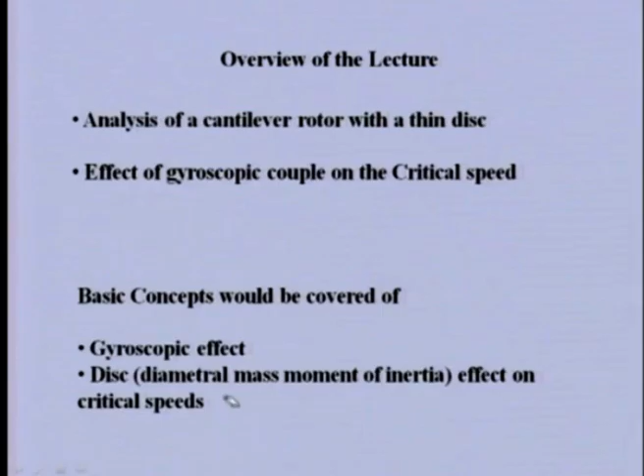Now with a simple example, let us see when this gyroscopic couple will be predominant. Let us take a simply supported case in which this is the bearing axis, and we have rigid bearings, that is, simply supported condition, and this is the shaft elastic line. Let us say the disc is at the center, at the midspan of the shaft.

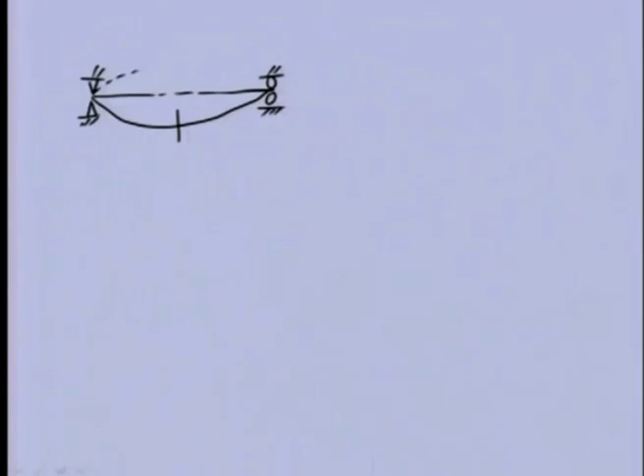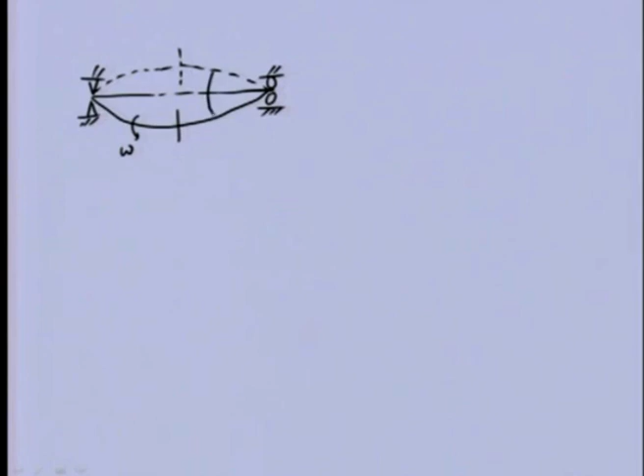During whirling, we will observe that the disc would not tilt. It is spinning about its own axis with omega, but disc tilting will not take place because it is at the midspan, and at midspan the shaft slope is zero. So during whirling, there will not be any tilting of the disc. Once the disc is not tilting about its diameter, there will not be any gyroscopic couple effect on this system.

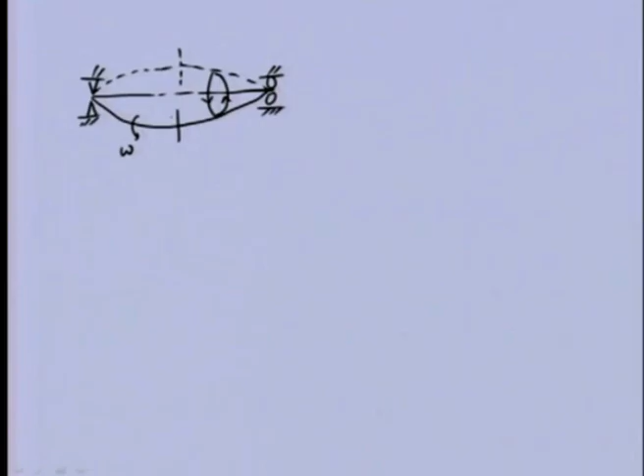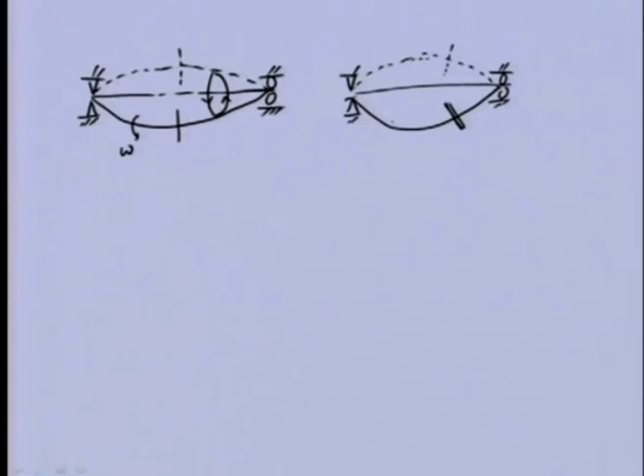But if the same system has the disc at an offset position, let us say here, then because the disc at any particular position should always be perpendicular to the shaft elastic line, we will find that the disc will tilt about one of its diameters in this plane. So not only are we having spinning of the shaft, but the disc itself is having some kind of precession frequency, and that is the whirling frequency of the disc.

So this wobbling motion of the disc, along with the spinning of the shaft, would give the gyroscopic couple. So we expect this gyroscopic couple effect will be present in this particular model.

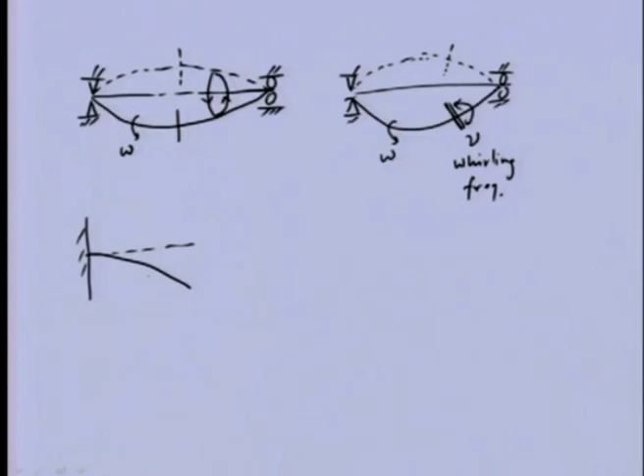Another case, if we consider a cantilever shaft, and this shaft is massless, only elasticity is there, and let us say the disc is in the form of a point mass m. If this is spinning at certain frequency during whirling, we expect this will occupy this position. So this is one of the cases.

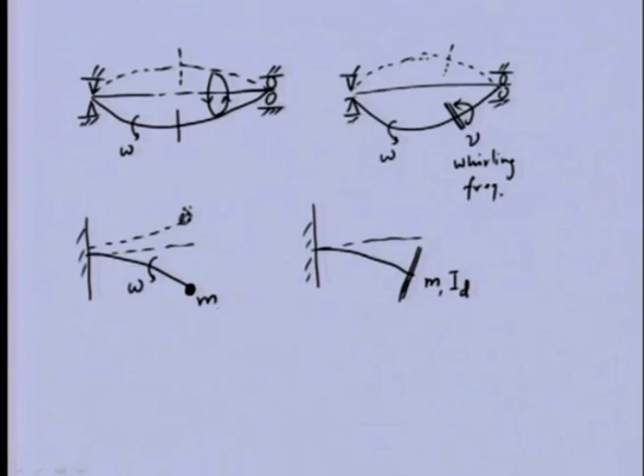If this particular cantilever beam is having a large thin disc of the same mass, but having diametral mass moment of inertia of the disc—in the previous case, because it was a point mass, the diametral mass moment of inertia will be nearly 0. When this is spinning, we will find that during whirling, this disc would be tilting about its diameter.

So in this particular case, we expect a gyroscopic couple. So you can see there will be precession frequency of the disc.

So if we consider this particular model of the rotor, in which the mass at the free end are same, but only difference is here is point mass, here it is disc—we expect the critical speed of this system and this system should not be same. Especially when this particular speed is high, we will find that the gyroscopic couple will make the critical speed of this system and this system different.

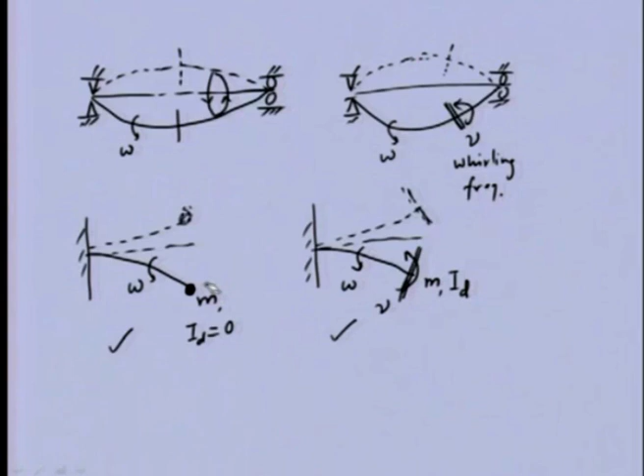So with this example it is very clear when the gyroscopic couple will be present in the system and when it will not be present. So when a point mass is there in a cantilever beam, we cannot expect a gyroscopic couple in that, because its diametral mass moment of inertia is 0.

So now we'll consider a simple cantilever beam. We will not be considering any unbalance in that particular disc. We are assuming that there is no unbalance in the disc, and we are operating near the critical speed of the system, so that the natural frequency or the whirl frequency is equal to the spin speed.

As I mentioned, when gyroscopic couple is there, the whirl frequency and the spin speed may not be same, but in this particular case we are considering a very special case in which we are trying to find out at what speed the whirl frequency is equal to the spin speed. That means we are trying to find out directly the critical speed of the system.

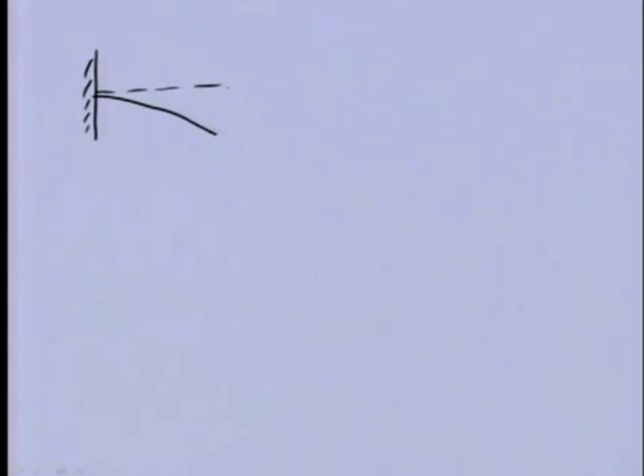In this particular case let us try to analyze a cantilever beam with a large disc at the free end. If this is the disc, this shaft is spinning and the disc is also spinning with the same speed. Because of this, for this particular configuration, let us say when the shaft is at the bottommost position during whirling, let us see for this particular instant how the centrifugal force of various mass elements of the disc is acting.

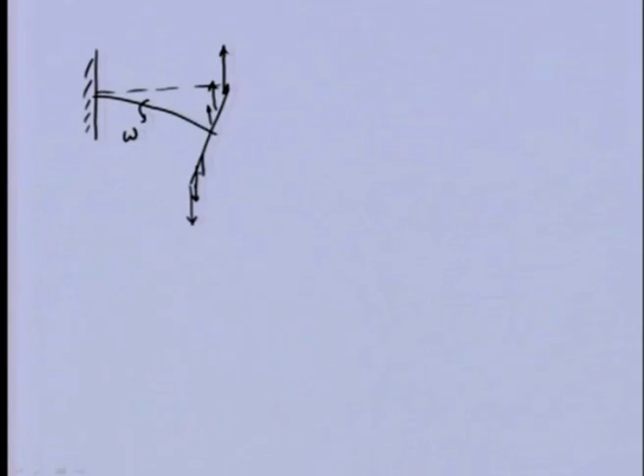For this particular instant, we will see that the mass element which is away from the spin axis will be having large centrifugal force, because it is spinning about this. As we come toward the spin axis, these centrifugal forces will be lesser and lesser, like this.

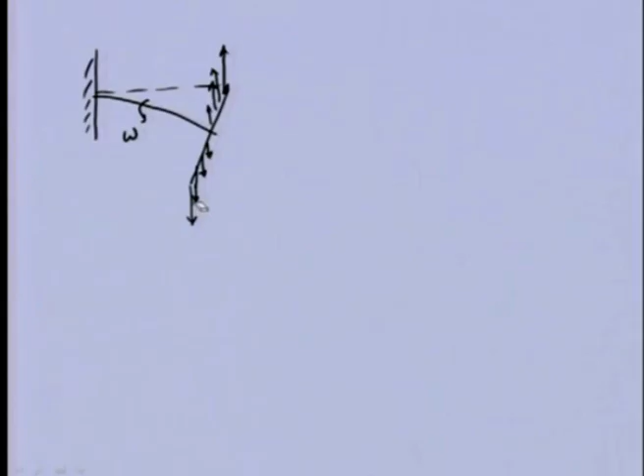Now, if we see the effect of this centrifugal force, what it is trying to do to the disc—it is trying to apply a couple which is acting in the counterclockwise direction. So it is trying to orient the disc to its original vertical position, because the tilt of the disc during whirling is this angle, and this particular moment is trying to oppose that tilting which is coming from the centrifugal force.

So we will see that because of this moment, the effective stiffness of the shaft against rotation is becoming higher, because this particular moment is trying to prevent—it is making this particular angular displacement lesser and lesser because of this moment. You can expect that when the centrifugal force is high, as we are increasing the speed, this will be more and more, and we expect this moment will be more, and because of that the effective stiffness of the system increases.

As we know from fundamentals, the natural frequency is defined as root square of k by m. So if stiffness is increasing and mass is the same, we expect that the natural frequency of the system should be increasing.

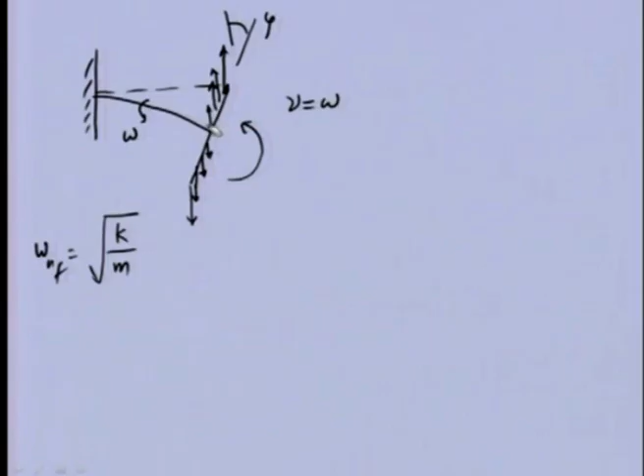This particular phenomena, which I have illustrated through the centrifugal force concept, we will see in more detail through the concept of quasi-static analysis, in which we will find out the effective force and moment this centrifugal force is applying at the free end of the shaft, and from there we will get the frequency equation to calculate the critical speed of the system.

Now we will analyze how the whirl frequency of the system increases with the spin speed of the shaft because of the centrifugal force. Let us take the same example, and now we will see this particular disc from the side, to see how this system behaves.

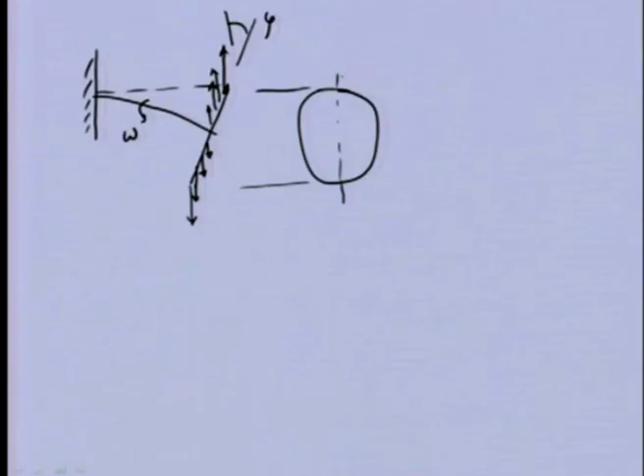Let us say this is bearing axis B2, and this bearing axis we are representing as Z, and this direction is Y. So this angle will represent as phi x. This is the static deflection, let us say delta, of the center of the shaft or the disc.

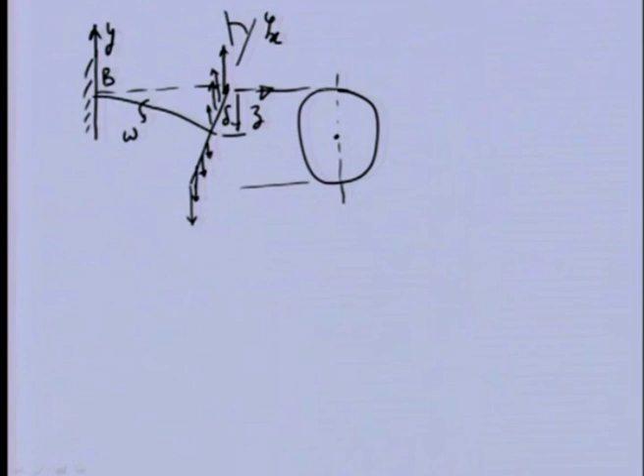Let us say the intersection of this axis to the disc is B. This is the shaft center which is coming from here, and this B to C distance is the translatory displacement of the shaft from its equilibrium position of the bearing axis.

Now, if we consider a small mass at radius r1 from the bearing axis, and look at the motion of this disc, as I told, we are looking into the condition of synchronous whirl. Let us see what this particular motion represents.

In the synchronous whirl condition, the spin speed, that is the spinning of the disc, and the whirling frequency - considering this as a cantilever beam - the whirling frequency and the spin should be the same.

When we consider this synchronous whirl condition, the shaft will bend, and once it is bent, it will be rotating about the bearing axis in rigid body mode, without further bending of the shaft.

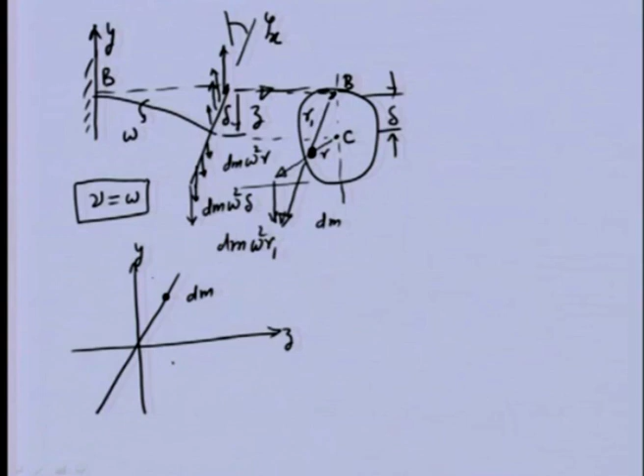This is the disc, and let us say there is a particle here having mass dm, at point P, and this is the shaft attached to the disc. Now this is the center of the disc, C. The tilt is about the x axis, so phi x.

This is the case for pure whirling, with no spinning. If we view from the side, let us say this is the y axis and this is the z axis, particle P is here at radius r, and this is the center of the disc.

Now consider this particular force acting in the downward direction. For this configuration, not only this mass but each and every mass will have the same inertia force, because each particle of the disk has the same delta displacement. So this mass dm at P will have a force dm omega square delta, acting in this direction on this plane.

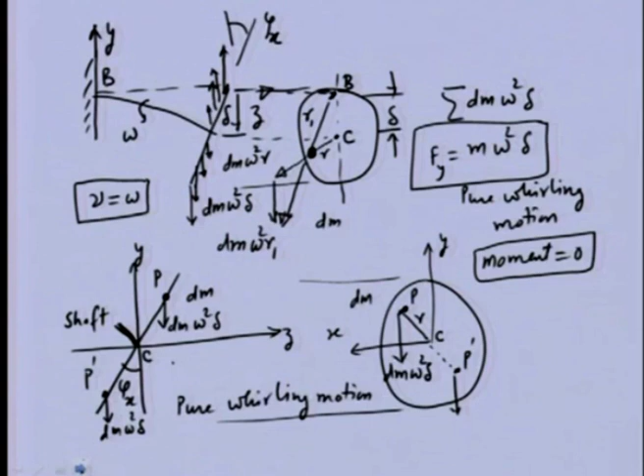Now let us consider the pure spinning motion of the disk. I am again drawing the free body diagram of the disk in, let us say, the z-y plane. Z is the bearing axis, the disk is here, and the shaft is this one.

Now, if we take the diagram in other plane, we will see the disk like this. This is the center of the disk C. These are the y axis and x axis. P particle is, let us say, here, and radius of that is r. Let us say this inclination with respect to x is theta.

Here, because of the pure spinning, we have centrifugal force omega square r dm, acting radially outward. This particular force we can take components in two directions. From here we can relate, let us say, this distance is y and this distance position from the position of the mass is x.

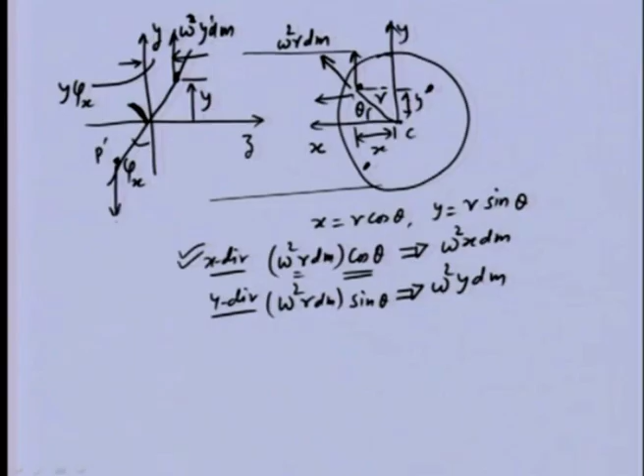If we consider another point, let us say below, this particular force in the y direction, if we consider here p prime, which is below, this will act in this direction because it is spinning. The magnitude of this will be the same as the upper one. So you can see that they will make a couple. They will balance each other, but they will make a couple.

The magnitude of the couple we can find out will be, so let us say for single mass dm, the couple about the bearings, the shaft center, in the yz plane, omega square y dm is the force, and moment arm is y phi x. This is the moment arm. So this is a couple due to a mass dm.

If we sum such moments, we can get the total moment due to the various forces, and because omega is constant, it will come out of the integration. This is also independent of this integration. So we will be having y square dm, and we know y square dm is nothing but diametral mass moment of inertia of the shaft, of the disc about its diameter.

Because in this particular case, when we are considering pure spinning, I will speak on here. For the case of pure spinning, we found that the x component forces are cancelling each other, whereas the forces in the y direction, they are giving a pure moment, and that moment is the gyroscopic couple moment.

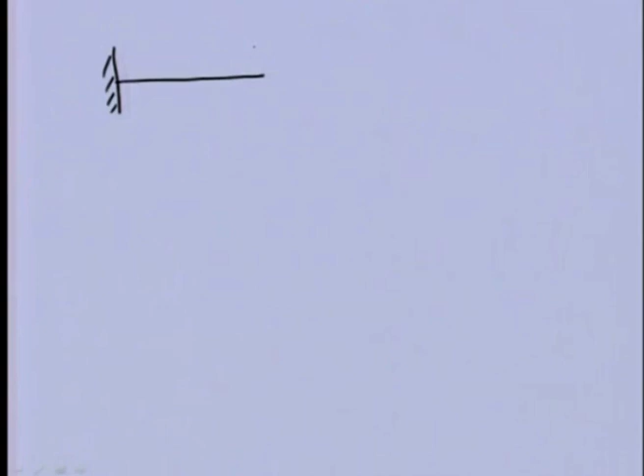From the previous analysis of pure whirling and pure spinning, if we remove the disc onto the shaft, we will be having an inertia force and a moment. The direction of moment in the previous slide we can see is this particular force is producing a counterclockwise moment in the YZ plane, so that particular direction we have retained here.

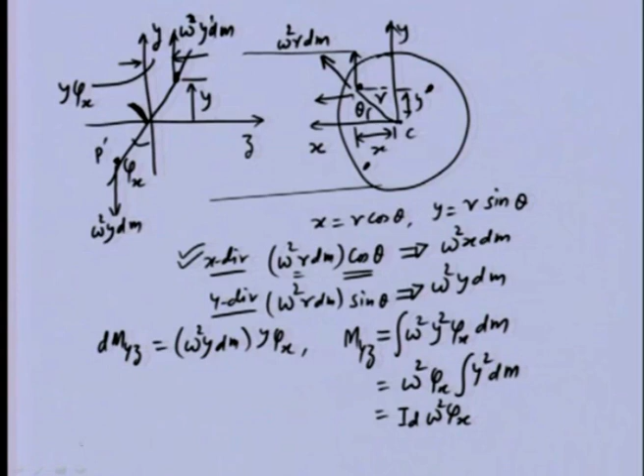Now effectively our problem is that we have converted the dynamic forces into a static force. So that means basically we have converted a dynamic system to a quasi-static system, and now we will be obtaining what is the deflection and angle because of this particular force.

From strength of material deflection theory, we have such relations, like for displacement, the linear displacement is given because of the force and because of moment. So this is the linear displacement, and if we apply force and moment, we will get this relation.

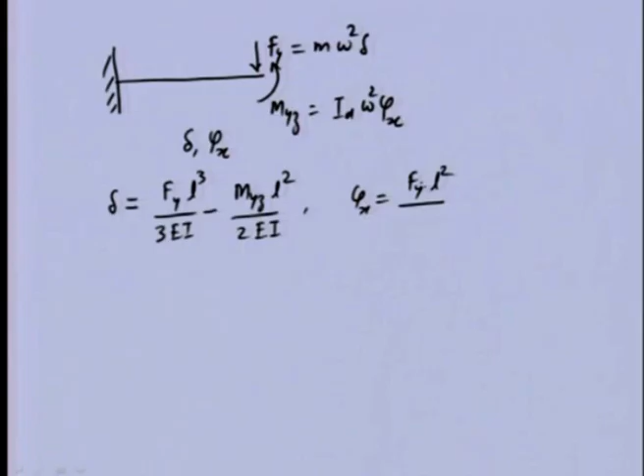Similarly, for angular displacement, we have relation Fy L square by 2EI, then due to moment, because we are dealing with the linear system, displacements because of this moment and force can be added up to get these relations. This is coming from the deflection theory of strength of material, so any strength of material book can be referred to for such relations.

Now we need to substitute the centrifugal force and gyroscopic moment in this expression. We can substitute like this: gyroscopic moment, and similarly in the deflection rotational displacement.

Now we will see that these two equations, equation 1 and 2, basically each and every term, contain either linear displacement or translatory displacement or angular displacement. Here also delta is there, here also phi x is there. So all terms containing these, basically they are homogeneous equations.

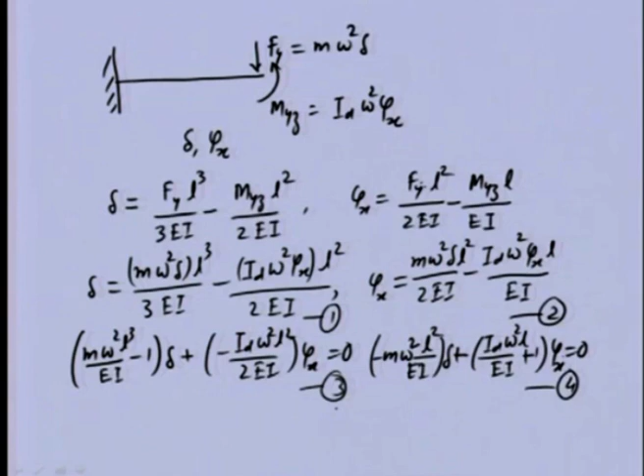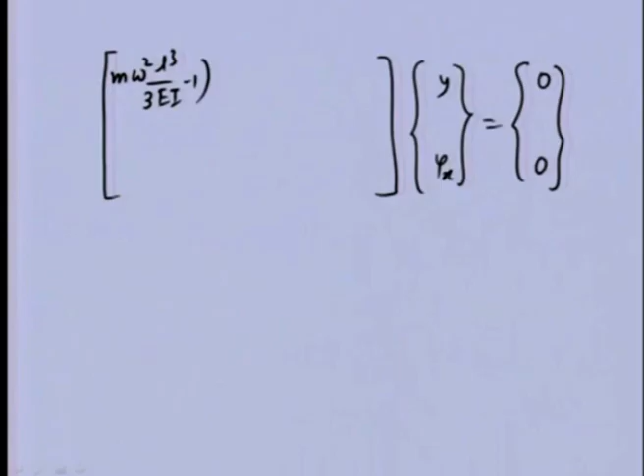Equation 3 and 4 now we can put in a matrix form. We can write this as delta, phi x, and because this is a homogeneous equation, the right hand side is 0. So here we have m omega square L cube by 3EI minus 1 as the first term, then minus ID omega square L square by 2EI, and here minus m omega square L square by 2EI, and here ID omega square L by EI plus 1.

Now this is a homogeneous equation. One solution is when both displacements are 0, which is the case when we are not considering the motion at all. So for a non-trivial solution, for non-zero displacement, the determinant of this matrix should be 0, and if we set the determinant of this matrix to 0, we will get a polynomial in terms of omega, which is the critical speed of the system, because we started with the whirl frequency equal to omega.

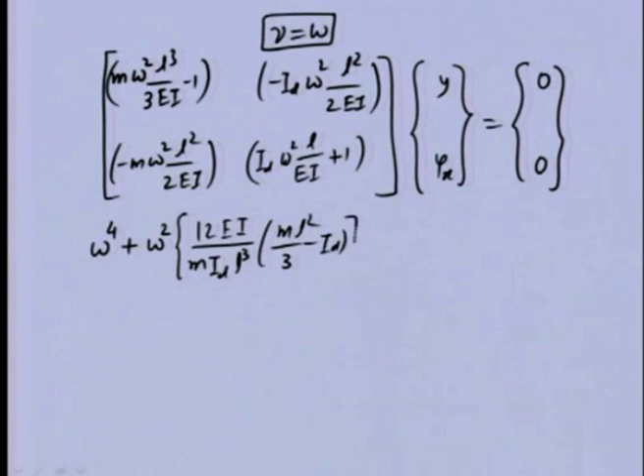So we were looking for the critical speed of the system directly, and we will get a polynomial in terms of omega. Basically it is a quadratic in omega square. So this equation will be, after rearrangement, a square term, then a constant term.

Equal to 0, so this is a polynomial, and we can close the bracket. We can solve this for omega square. The polynomial which we have got is basically a frequency equation, and we could solve it in terms of omega square, but in this particular expression, several variables are there. Now we will try to reduce the variables so that we can do a better interpretation of this equation, so I am defining two non-dimensional terms.

So first is the critical speed function, a non-dimensional term defined as spin speed square times m L cube by EI, and another is the disk mass effect, mu, which I am defining as diametral mass moment of inertia divided by m L square. So these two are the non-dimensional terms.

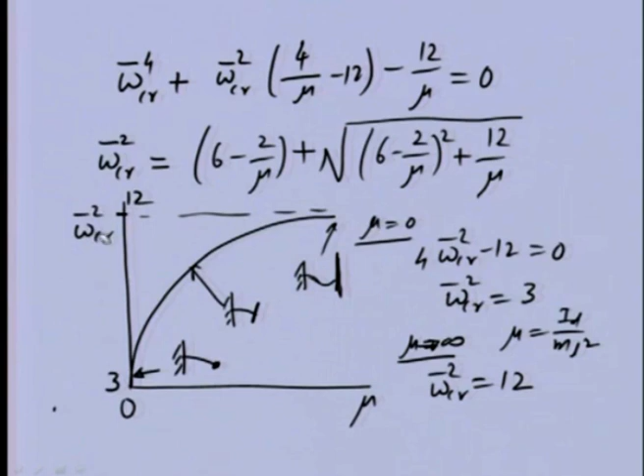Today's lecture we have seen how a critical speed for synchronous whirl condition of a cantilever beam we have obtained. In this particular case, we have considered...

a very special case in which not only the motion is synchronous whirl, that is the spin speed and whirl frequencies are same, but their direction is also the same.

and we have seen that as we increase the disk effect, we increase the gyroscopic moment, and because of that we have an increase in the critical speed. So, as we saw in the beginning of the lecture, the centrifugal force tries to tilt the disk to its original position.

So, it increases the stiffness of the system, and because of that the critical speed should increase.

So, finally, we have seen that particular effect: as we increase the disk effect, the gyroscopic moment will be more and more, and we will have an increase in the critical speed of the system due to the gyroscopic effect.